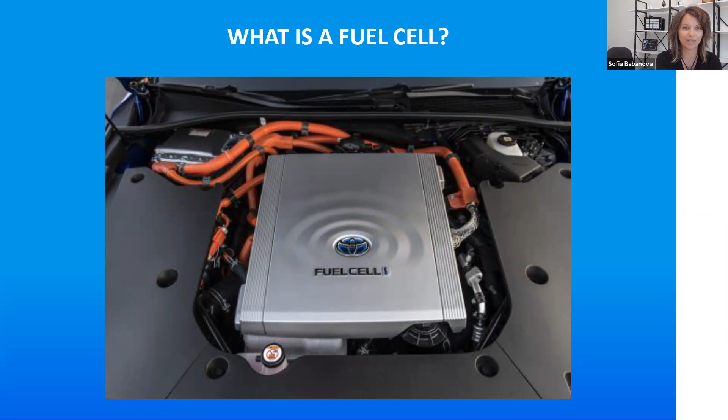So before we go into the topic of microbial fuel cells, I would like to explain what a fuel cell in general is, since microbial fuel cells are technically fuel cells. They're not that black magic as you think. So what is a fuel cell actually? A fuel cell is an electrochemical device that can transform chemical energy into electricity. So how is this done? There are a couple of components the fuel cell has. There is an anode, where an oxidation process occurs. There is a cathode, where there is a reduction process. And we often have a membrane to separate the anode and the cathode.

So a fuel, in this case hydrogen, comes into the fuel cell. It is oxidized at the anode by an inorganic catalyst, releasing electrons. These electrons travel through an external circuit to the cathode, where it's coupled with the oxygen reduction reaction in most cases. So then what is a microbial fuel cell? A microbial fuel cell is a fuel cell, as I mentioned before. It has exactly the same components. It has an anode, it has a cathode. Sometimes there is a membrane, sometimes there is no membrane.

But the main difference between these two technologies is that instead of inorganic catalysts, we have bacteria present either at the anode or the cathode that facilitate the oxidation and reduction processes, which makes microbial fuel cells bioelectrochemical devices. But they can still transform the chemical energy into electricity. In the case of microbial fuel cells, though, the fuel that comes into the cell is not hydrogen, it's some kind of organic. It can be a pure organic such as sugar, glucose, fructose, or acetate, or it can be something more complex such as wastewater. MFCs can generate electricity from any form of biodegradable organic matter.

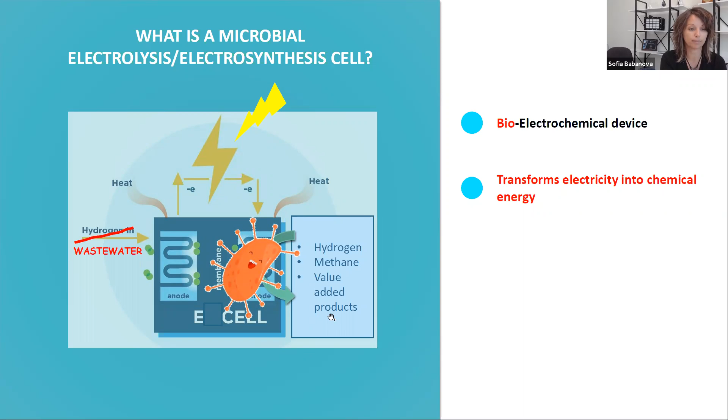And since we are oxidizing this organic matter at the anode, we are removing these organics from the wastewater. Oriana, can you please go to the next slide? Thank you. So this makes MFCs extremely suitable for wastewater treatment. There are other bioelectrochemical devices similar to MFCs, sharing a similar concept and similar design features, which are microbial electrolysis or microbial electrosynthesis cells. But unlike MFCs, they transform electricity into chemical energy. They also use bacteria either at the anode or the cathode, but the final goal of these devices is to produce value-added products, such as hydrogen or methane or something else. So what is the secret behind these bioelectrochemical devices?

Why can they do what we are saying that they can do? And the reality is that nature created these special bacteria, special microbes that are able to perform the so-called extracellular electron transfer. So they consume organics to gain energy. They oxidize these organics within the cell body. They release electrons, but these electrons do not stay inside. They actually travel through the cell membrane outside of the bacterial cell.

And they reach this solid electron acceptor, which in nature is some kind of mineral like iron oxide or manganese oxide and so on, and they respire. And that's how they gain energy in nature. We take advantage of nature and we replace this mineral with an anode surface. So bacteria do exactly the same thing. They consume the organics, they release electrons, perform this extracellular electron transfer. But this time, we capture these electrons at the anode, transfer them to the cathode to generate electricity.

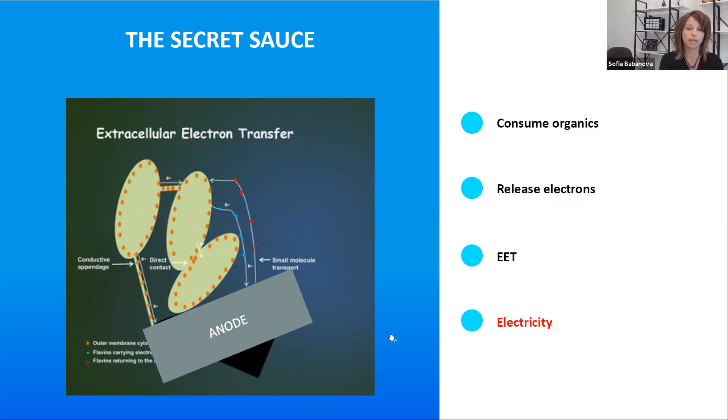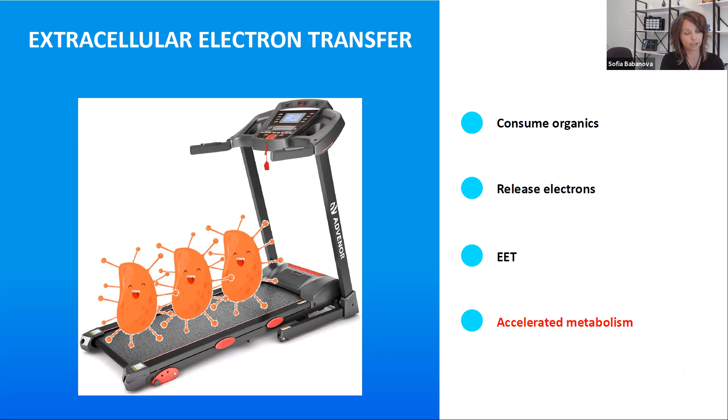So we are constantly pulling away energy from bacteria during the oxidation process. And by doing that, we are accelerating the bacterial metabolism. So these are microbes that are constantly on a run. They have to consume the organics faster. They have to consume more organics in order to gain some energy for themselves. That's why MFCs, when applied for wastewater treatment, can do it faster than traditional wastewater treatment technologies.

So there has been a global interest in MFCs throughout the whole world. On almost every continent, there are many research groups that have worked on microbial fuel cells for many years. And the concept of microbial fuel cells was discovered in 1911 by Professor Potter, who first came up with the idea of using microbes to produce electricity. But the research activity didn't pick up until the early 2000s, after which we can see an exponential growth in the interest and the number of publications within that field.

And the reason why this happened around the year 2000 is because MFCs were recognized as a renewable energy source. Since they can generate electricity from any form of organic matter, they are perfect as a renewable energy source. So many researchers started working in that area. That's how I was introduced to microbial fuel cells as well. But along the way, some hurdles and challenges have been faced. Some theoretical limitations have been recognized, and slowly the interest moved from renewable energy source into wastewater treatment solutions, since we are removing the organics from the solution. So around 2008, that was the main focus of MFC research.

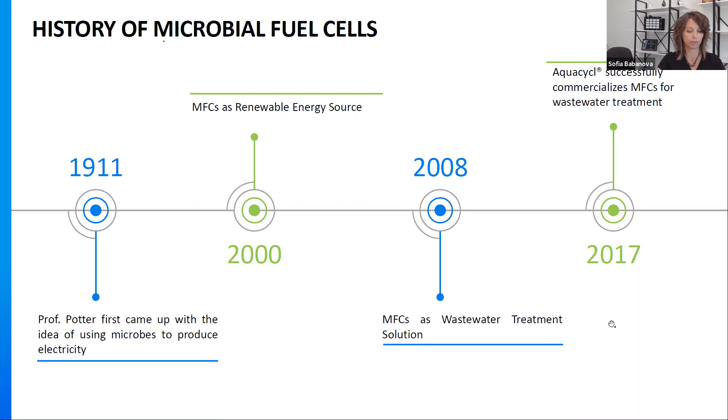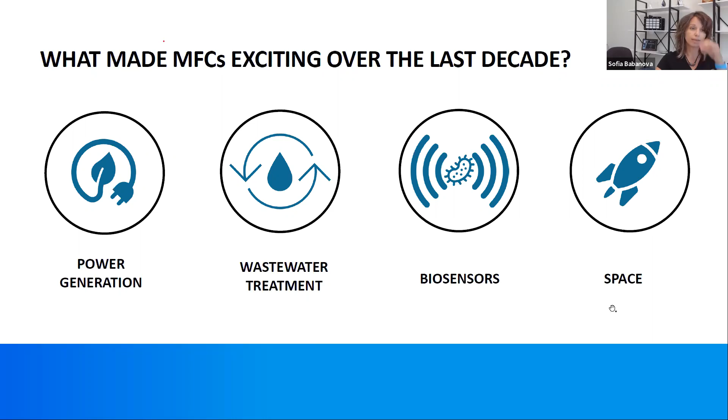So what made MFCs so exciting over the years? I mean, we can generate power, that's great, from any organic matter, which means we can treat wastewater, that's even better. They can be used as biosensors to study the health of the microbial community, be used in other wastewater treatment applications, and MFCs can be used in space to recycle the waste products, the wastewater, and generate power. But despite these exciting features, people shifted their interest from power generation into wastewater treatment. But what Aquacycl is actually trying to do is to take both these advantages and develop a self-sustainable wastewater treatment solution.

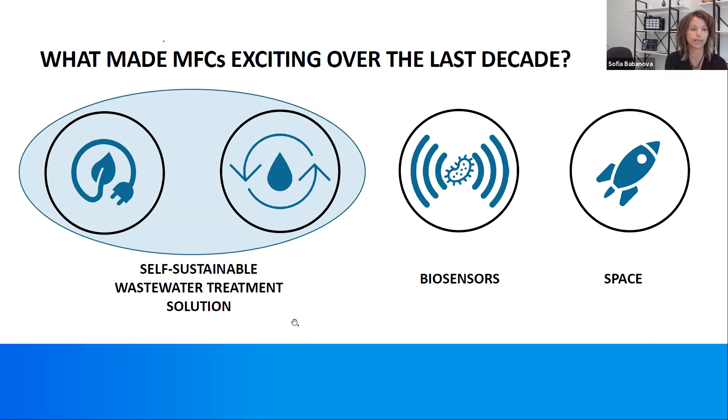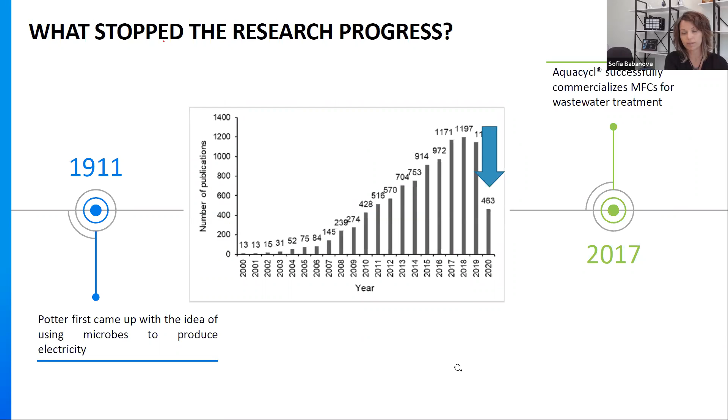So what happened? Why in the year 2020 was there a decline in the number of research publications? And there are a couple of answers. First of all, there was COVID. And second, many research groups tried to scale up these devices, and that proved to be very, very challenging. In addition to that, around 2018, the research interest shifted towards microbial electrosynthesis cells and using microbes to synthesize value-added products. But we are going to talk about scalability more in this webinar.

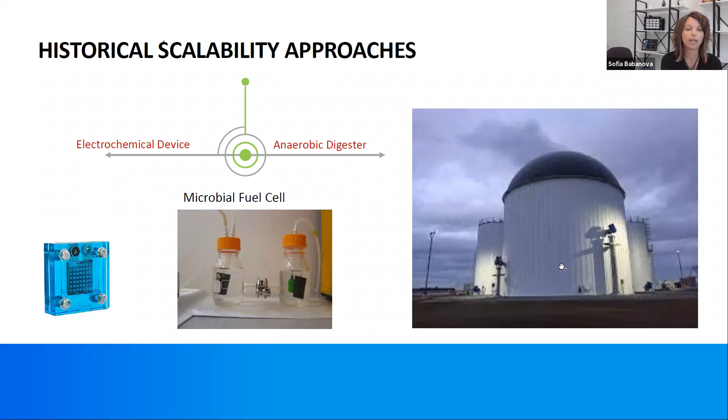Why was scalability such a big issue, and why was it so difficult to scale these devices into real technology and apply them in practice? The reason is the dual nature of microbial fuel cells. As we said, they are bioelectrochemical devices. So they have this electrochemical component. So do we scale them as electrochemical devices, or do we use the biological component for wastewater treatment and scale them up as anaerobic digesters, for example? So we'll go through the differences between these two approaches and the limitations that researchers faced there. So if we think about MFCs as electrochemical devices, as I mentioned, they are fuel cells.

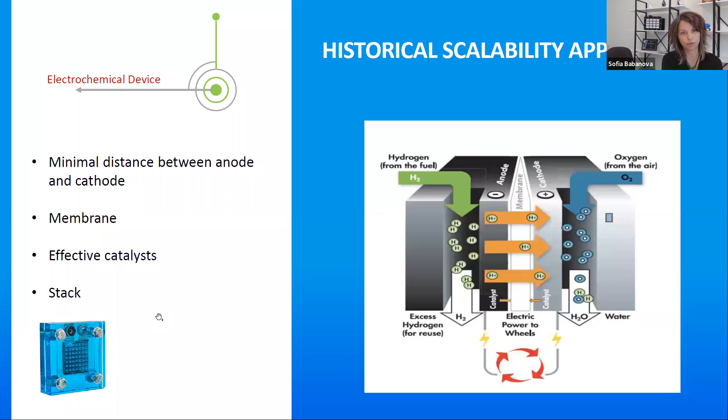As fuel cells, they require certain aspects to be met, like minimal distance between the anode and the cathode. There should be a membrane to separate these two electrodes since they're so close to each other. You have to have a very effective catalyst to produce enough power. And of course, one fuel cell cannot provide enough to power anything, so you have to have a stack of those. So we'll go through all these different aspects.

Let's talk about minimal distance between the anode and the cathode. In order to minimize the electrical losses, the anode and cathode need to be close to each other. But when you're talking about wastewater treatment, that makes this required sandwich structure not very applicable because wastewater has high solids content, and that will cause clogging issues. And having the anode close to the cathode, there is some crossover of oxygen from the cathode to the anode. So aerobic conditions appear at the anode surface, which are detrimental for MFC operation.

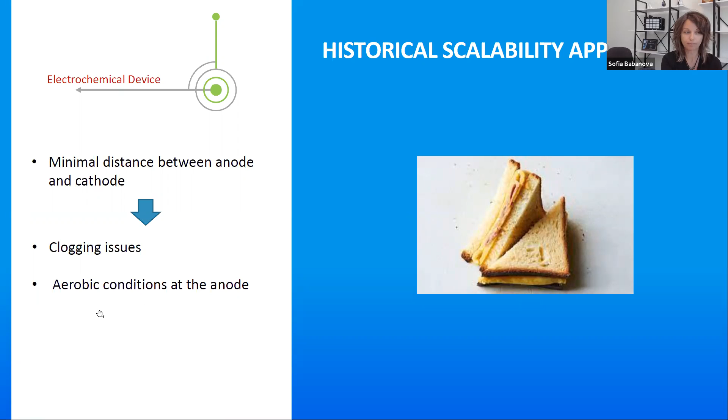Then we want to treat wastewater. Wastewater has big volumes. What do we do? Do we just make a bigger sandwich to accommodate more volume? Can we do that? How can we do that? Scaling up electrodes, making them bigger, introduces huge ohmic losses because electrons now have to travel a long distance in order to be utilized. In addition, the majority of electrodes in microbial fuel cell applications are based on carbon textile material, so keeping the mechanical strength when they're so big has also been a challenge for many research groups.

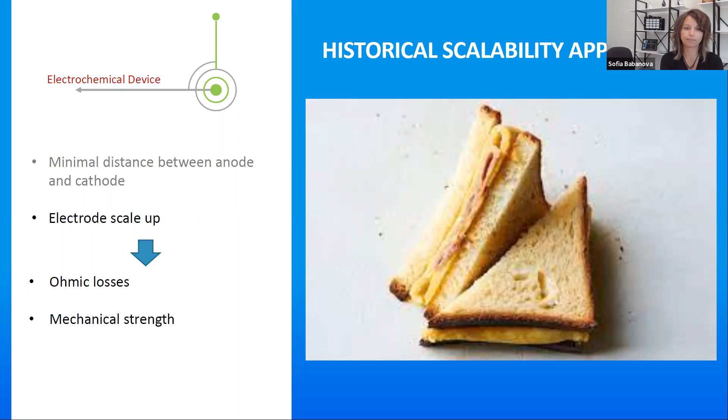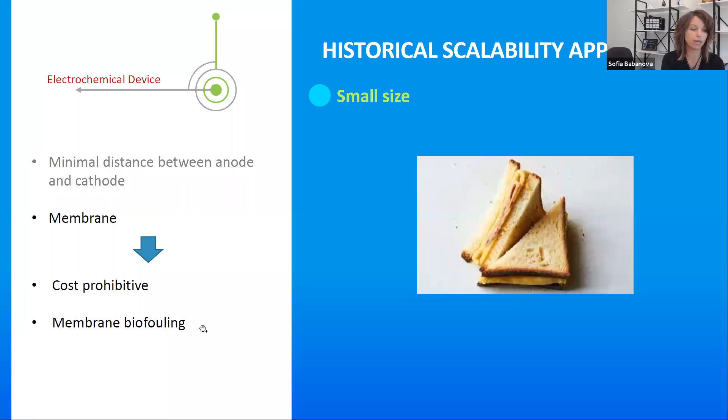So MFCs have to be small. If we want to optimize them as electrochemical devices, they have to be small. They cannot be big. I mentioned you have to have a membrane in that sandwich structure, between the anode and the cathode. Membranes are really expensive, which makes MFCs cost prohibitive and not competitive with other wastewater treatment technologies. And when these membranes are in contact with bacteria or wastewater, they're prone to very fast biofouling.

We have to have an effective catalyst if we want to get more power. Unfortunately, the best catalysts for oxidation or reduction processes are gold and platinum, which are very expensive. That also adds to the cost of MFCs, and they're not cost competitive.

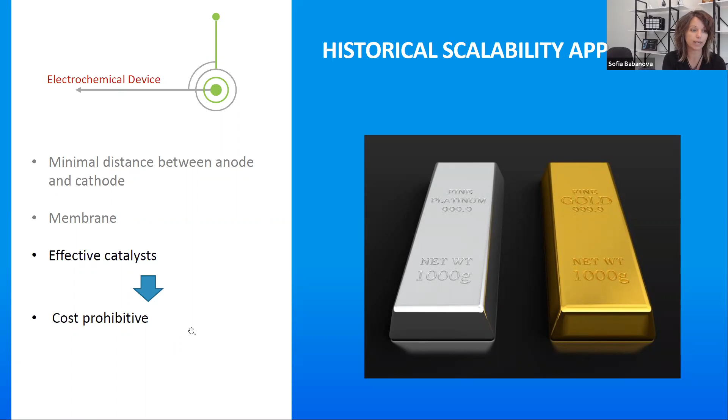And as I mentioned, there are theoretical limitations on how much power can be produced by one fuel cell, regardless of whether it's just a fuel cell or a microbial fuel cell, which is not enough to power a fridge, let's say. So you need a multiple stack of those. Technically, you have to have multiple sandwiches, or a big lunch.

Some research groups have managed to use that approach efficiently. Bristol Robotics Lab in the UK took that approach, having small microbial fuel cells, multiple in stacks, treating urine to generate power and power the light bulbs in the toilets. They were successful in that adventure. Unfortunately, because of the small size of the MFCs, they are applicable only for urine treatment. It cannot be applied to any other type of wastewater that has high TSS content because the small size will be prone to really fast clogging.

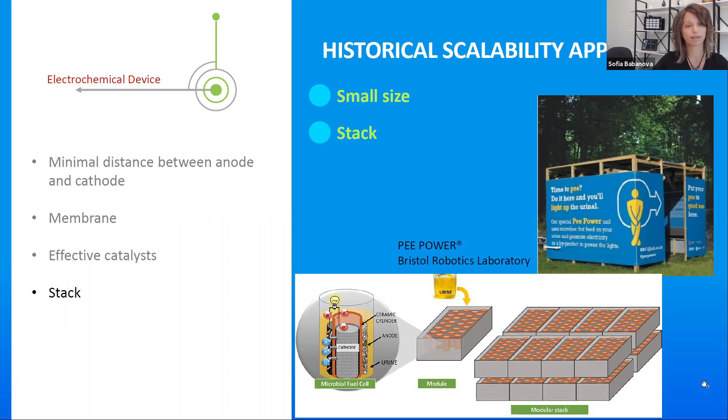So let's take a look at the other approach. What if we scale up microbial fuel cells as anaerobic digesters? Anaerobic digesters are big. They have to hold a lot of volume. Anaerobic treatment usually takes from a couple of days to a month, so all this volume needs to be kept in there. They operate in batch mode, which means the water sits there for the duration of the treatment, and then it's replenished. So if we try to scale up microbial fuel cells like that, we have to make them big.

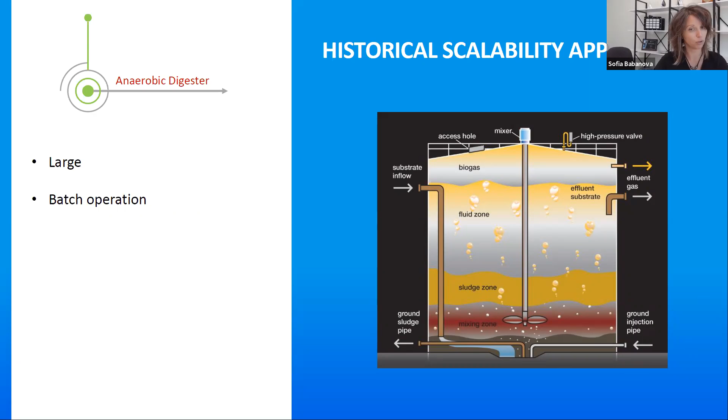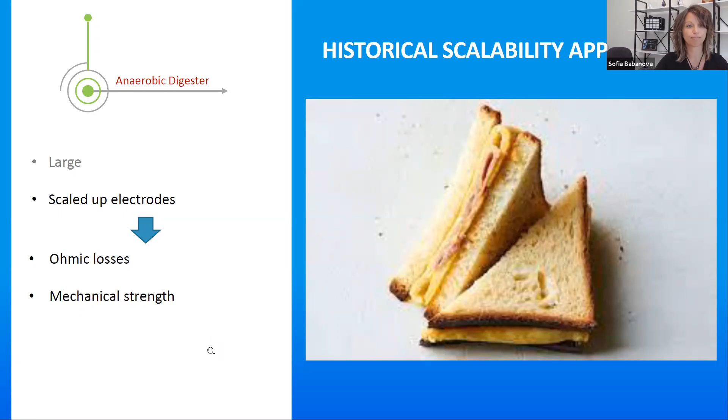And we are going back to the same challenges we discussed earlier. If you want to make microbial fuel cells big, we have to make a big sandwich, right? We have to scale up the electrodes, and we see the same ohmic losses and the same mechanical strength issues. But let's say we managed to overcome that and build enormous anodes and cathodes and place them in a gigantic microbial fuel cell. Then these electrodes are so far from each other that we face mass transfer limitations, which means the electricity generated will be so small that it cannot drive the wastewater treatment fast enough as in other MFC designs.

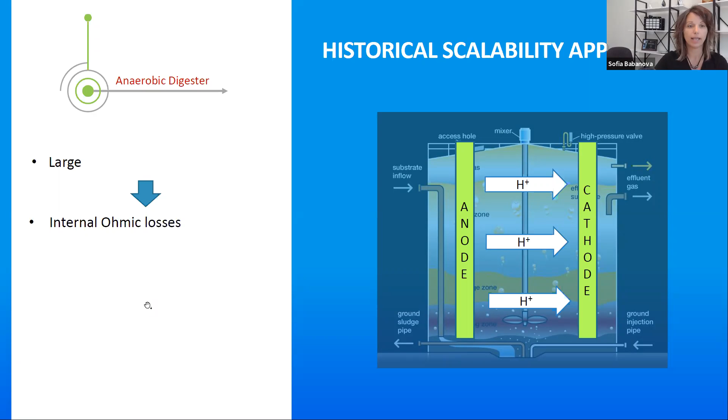And also, when we have one big microbial fuel cell, we can generate voltage theoretically up to 0.8 volts. We are not taking advantage of having a stack of fuel cells and increasing the power.

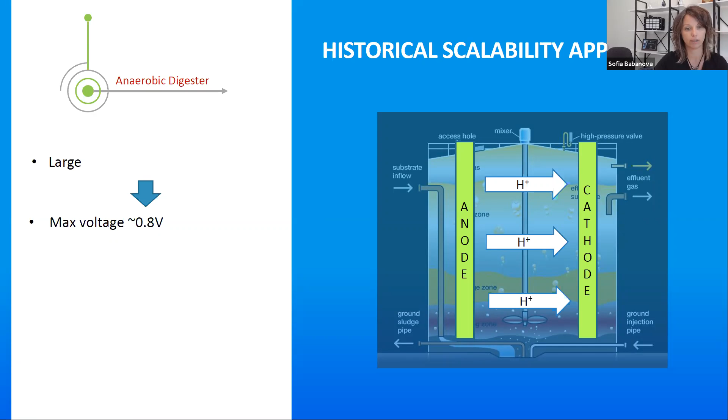Another aspect is that, as I mentioned, anaerobic digesters work in a batch mode. And that means that bacteria processing this wastewater release final products. And these final products actually cause inhibition effects. Bacteria sense them and they say, okay, stop, we work too much. Now we have to slow down. And that was the reason why for many years it was thought that MFCs cannot be used for high strength wastewater. They're applicable only for low strength wastewater because most lab studies have been done under batch operation.

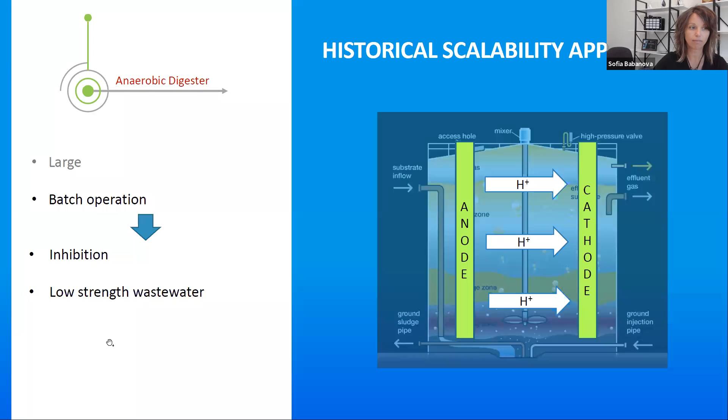So what has Aquacycl done differently than other research groups? Why did we manage to be successful in that scaling up process? And the reason is that we took that middle ground approach. We didn't scale up the technology only as an electrochemical device or only as a biotreatment process. We have a microbial fuel cell reactor that is the size of a standard car battery. So it's not small, but it's not big as well. That minimizes the clogging issues.

The anode and the cathode are far away from each other so that we can keep an anaerobic zone around the anode. Then because the fuel cell is not big, we reduce the ohmic losses. We don't have these mass transfer limitations. And we managed to scale up the electrodes to an extent where we can still maintain mechanical stability and performance efficiency.

We do not use a membrane, which eliminated the biofouling problem. It made the MFCs more cost-effective and reduced the ohmic losses that can be introduced by the presence of a membrane. We found a cost-effective catalyst to be applied that makes MFCs affordable and scalable.

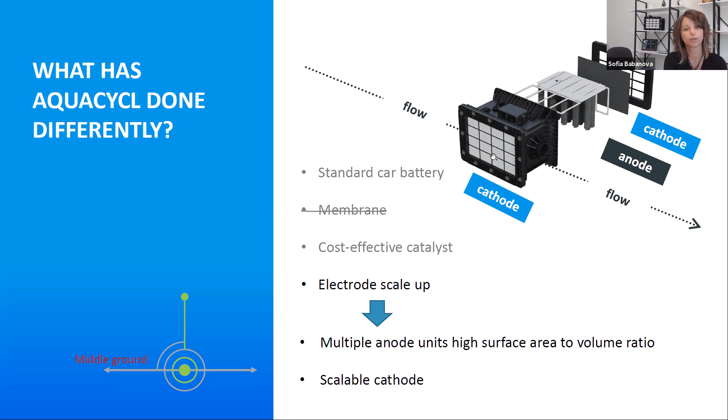And as I mentioned, we managed to scale up the electrodes. We took a dual approach. So we scaled them up slightly, made them a little bigger, but at the same time, we use multiple units, let's say multiple anode units, to provide high surface area to volume ratio. At the same time, they're spaced apart from each other to minimize clogging issues, but still have high efficiency. We took a similar approach for the cathodes. We have two cathodes on both sides of the microbial fuel cell to provide higher surface area.

So, but one MFC cannot do all the magic, right? It's impossible that one reactor can remove all the organics from the wastewater. We have to have multiple of those. But to avoid this batch operation, we actually run microbial fuel cells in hydraulic series. We call them treatment trains. So the wastewater goes into the first MFC. It has been treated a little bit. Then the effluent from that first MFC goes into the second, treated a little more, and so on until we reach the effluent quality that is desired.

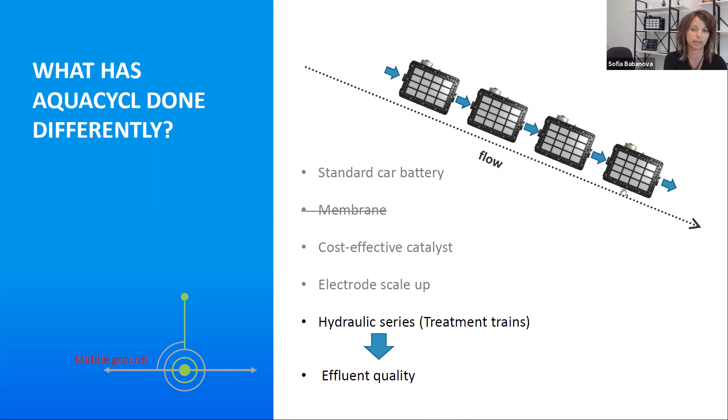So as I mentioned, this allows us to run the process under continuous mode, which means no inhibition. We are not accumulating these final products of the metabolic processes. And at the same time, we allow microbial communities to self-select in the different microbial fuel cells according to the wastewater composition at that point.

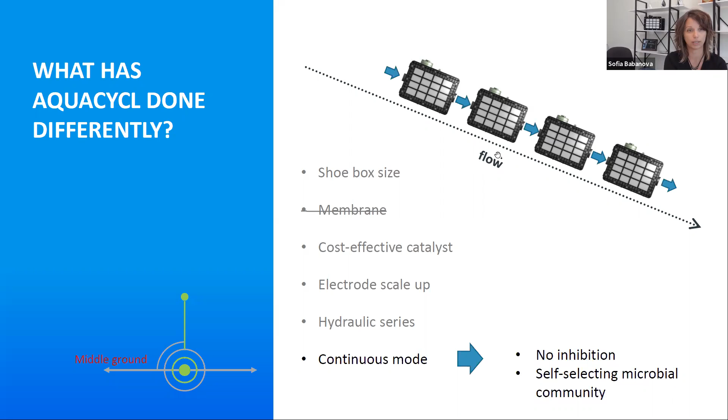And at the end, we take advantage of the modularity. We have multiple treatment trains that operate in parallel to increase the volume of the wastewater we can treat. And at the same time, that allows us to maintain the system easily. So we can maintain one treatment train while the rest of the system is still operational.

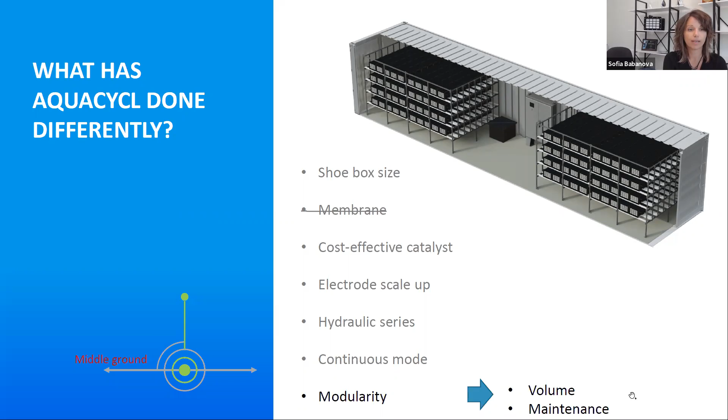And in summary, what has Aquacycl done differently? We optimize microbial fuel cells for wastewater treatment efficiency instead of energy recovery. We took advantage of the hydraulic series and treatment train design, operating the system under continuous mode. And we have these parallel treatment trains to increase volume instead of having one big reactor. In addition to that, we provide real-time remote monitoring of the system performance and control.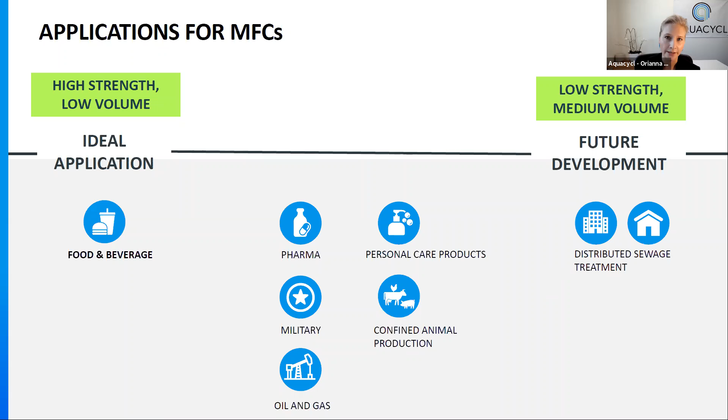We think the best case application in that industry is really going to be on the distributed side. So looking at replacements for septic and or small communities in terms of decentralized wastewater treatment and sanitation. But that's low strength, right? And still addressing a smaller volume than the larger centralized systems. And so, where the technology has been a good fit so far, has been focused in these areas where you've got really high soluble and insoluble biological oxygen demand, or BOD. So the insoluble, right, represents itself as total suspended solid, or TSS.

But some of the challenges that conventional treatment technologies face are the same that microbial fuel cells face, right? Fats, oil, and grease. That becomes an issue when you've got anaerobic digestion or activated sludge or any membrane technology. And so fats, oil, and grease, or FOG, also is a challenge for microbial fuel cells, but we can tolerate up to around 300 milligrams per liter of FOG. That's higher than most conventional.

You're still going to have challenges with MFCs across extreme temperature ranges. There is more flexibility with MFC technology in that they can operate within a range of 10 degrees C up to 55 degrees C. So just above freezing and up to some of the hotter temperatures, but you still need to bracket that temperature control. pH range: it's a biological system, right? So you must stay within a pH range of between 5 and 9 for microbial fuel cells.

It's a little bit wider than some of your other technologies, which will be very sensitive to a more neutral pH. But overall, right, these are some of the advantages that microbial fuel cells can bring in terms of a wider operational range on some of these areas. And at least with our systems, we can tolerate a much higher total suspended solid concentration, or TSS, than many other conventional technologies. So we've demonstrated successful degradation and treatment of wastewaters with TSS up to 35,000 milligrams per liter, and that's a direct feed.

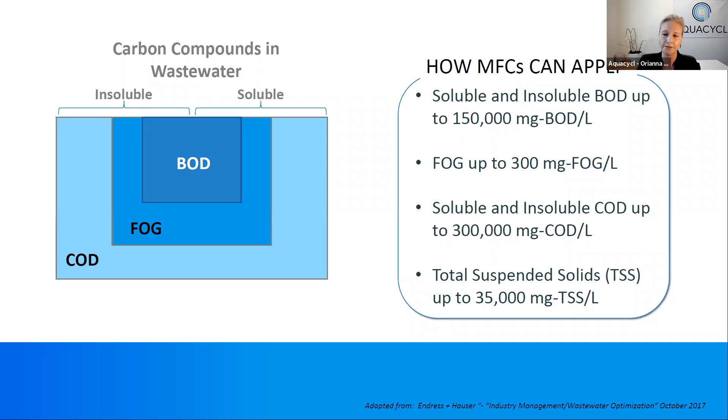But as Sophia had mentioned, the treatment efficiency is really going to be dependent on what it is that you're treating. So not only the concentration of your organic compound coming in, but also the composition. And so when you're looking at biological oxygen demand, especially in the food and beverage industry, depending on what you're making, your composition of wastewater is going to be different.

If you're confection, depending on where you are in confection, largely that's going to be simple sugar, right? Sucrose and glucose. If you're in soft drinks, you're going to have sucrose, glucose, but you're also going to have artificial sweeteners. You're going to have some caffeine. You're going to have some other additives in there, which will increase the complexity. In snack food, you've got starches, you've got more compounds that require hydrolysis and fermentation. Sugar refineries, just straight up sugar.

But in breweries, which has been one of the first applications of microbial fuel cells, you actually see some of the most complex wastewater because of what comes out. You've got some trace yeast, you've got some unfermented sugars, you've got hops, you've got potential residuals from grains, etc. And even though there's typically a solid separation step, you still have these trace elements. And during a fermentation with yeast, there's a lot of secondary metabolites that are involved, and that can occasionally be confounding to microbial fuel cells. And so the complexity of brewery wastewater is something that has challenged microbial fuel cells in the past.

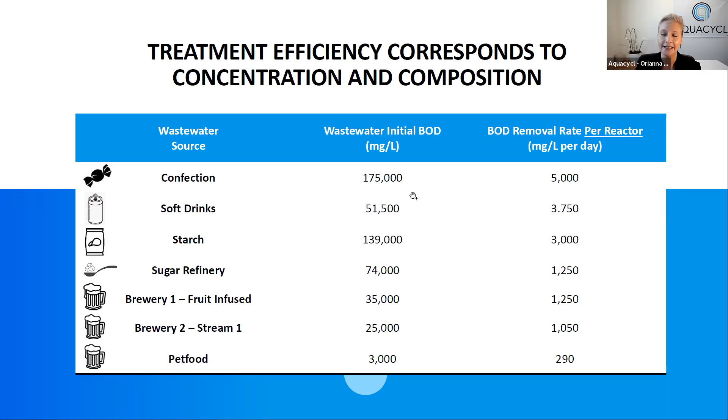But we see some of the best efficiencies and the highest treatment rates when we're dealing with the highest concentrations of BOD and the lowest complexity. So that's an easy target. That's a value add where the technology can be a good fit. Where some other technologies, like even high rate anaerobic digesters, are typically limited on feeds around 15,000 milligrams per liter. And so we're well above that in terms of what we can take in an undiluted fashion and treat in a range of hours instead of days.

And so how the technology really stacks up relative to others that are out there. We borrowed this and did a modification from one of our colleagues. When you're looking at biological oxygen demand in a range, you have the lower range of BOD, and this is generated from sewerage. So you've got municipal wastewater, which can come out in the higher range over here. And then you've got just some trace organics that you might want to remove for a reuse application. And your best bet for reuse applications at the tail end is always going to be a membrane-based technology right now.

But as you start to increase in organic concentration, going up the scale, you're now more limited in the types of technologies that can address these wastewaters directly. There's high rate anaerobic digesters, there's the conventional anaerobic process, and then there's anaerobic membrane bioreactors, which are also a solution to address these higher ranges. But none of them, to our knowledge yet, can address anything above 50 to 100,000 directly without some dilution or having to recycle multiple times through the reactor. So that extends your hydraulic residence time in total, which means your footprint is going to be a lot bigger, your residence time will be bigger depending on the flows that you have to manage.

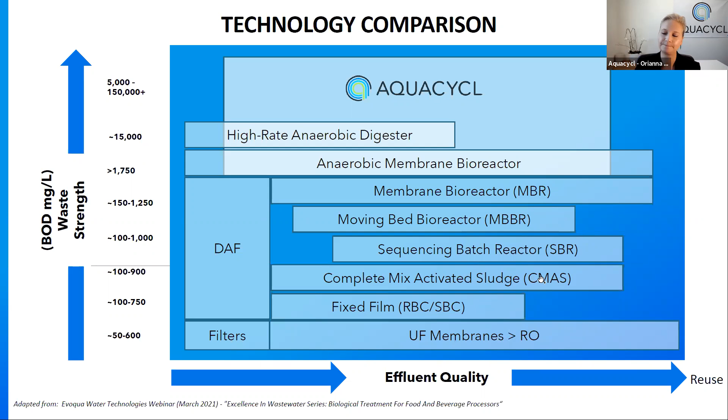So where we really see the best fit for microbial fuel cells is as industrial pretreatment, right? Because we can take in these high concentrations and take the tough stuff first. We apply to situations where a producer may be hauling wastewater offsite because they either are not permitted to discharge to their sewer, or the sewer surcharges are so high when they do discharge that it is cost prohibitive. So the alternative right now is just to truck it somewhere else. And so we can eliminate that, sit on site and treat that wastewater directly.

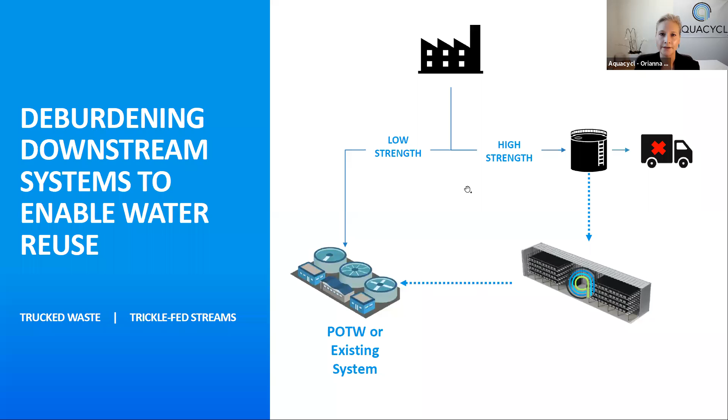And so either you're discharging to a POTW, to a sewer, or you're installing other technologies at the back end for a reuse application. But that is one of the first areas where MFCs can be a good application. The second, but less explored opportunity is really again, industrial pretreatment, but ahead of an anaerobic digester. So you have two anaerobic technologies complementing each other.

And anaerobic digesters have been the workhorse in industrial wastewater treatment for decades, and really the only solution that's been available and widely accepted for energy recovery as methane. But if you have an anaerobic digester at a production facility that's been there for a few decades, it may be aging. Perhaps the production environment has changed and you're sending more concentration to it than when it was initially designed for.

And so instead of having to rip that out and replace it, or adding new digesters or reaction tanks to that system, you can deploy a microbial fuel cell ahead of it to help decrease some of the loading going in, but also actually change the composition of that carbon that moves into the digester. So not only does some of that carbon just get fully degraded into electricity,

but that carbon composition becomes volatile fatty acid. And that volatile fatty acid, while kept within the right confines, can be a great feedstock for anaerobic digestion and actually increase the biogas production out of an existing bioreactor between 25 and 50%, depending on what it is you're starting with. So this is industrial pretreatment, but complementary to what is already out there to enhance energy recovery and health of an existing system.

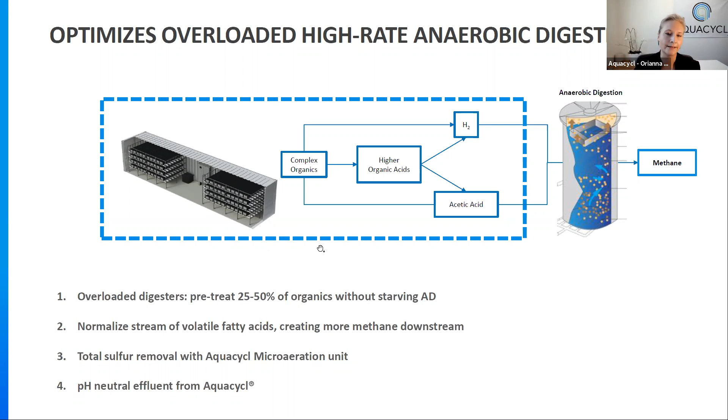And so we talked a little bit about the future, and really there's still work to do. Microbial fuel cells are still just getting into the early stages of successful commercial deployments. And so the next step on the research side really is looking at how microbial fuel cells can now be applied cost effectively and commercially into synthesis and electrolysis, as Sophia discussed earlier. That's still very nascent. On the commercial deployment of microbial fuel cells that are out there now, the next stage is how can we really take advantage of the energy recovery capacity of these systems?

We're not making methane, so there's no cogeneration capacity that comes with these systems, but we are making direct DC power. Now, in order to harness that, you have to have a battery pack installed. You have to capture that energy which is being recovered. You want to store it and then use it somewhere. But you're always going to have a loss if you're trying to convert from DC to AC usage.

So best case scenario is that you're storing your DC power and using your DC power in charging stations, where that's charging a forklift, or EV charging stations, or LED lighting, for example, in the warehouse facilities. And so we see those as the best first use cases for energy recovery from microbial fuel cells. And as capacities improve and as MFCs are further optimized for this process, you maybe can branch out into more power and more useful energy recovery from MFCs.

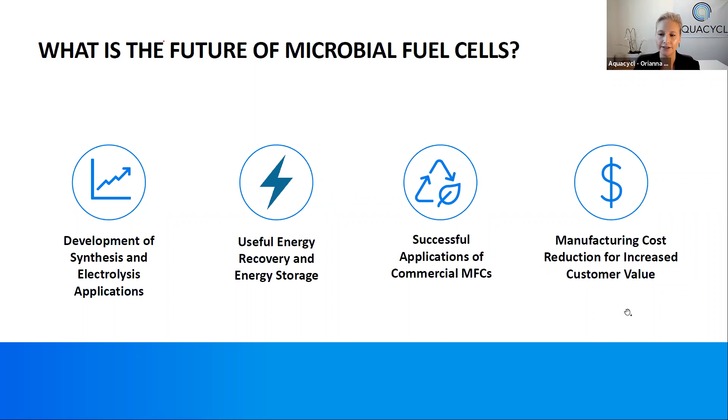And one of the big focus points that we have is really in energy recovery, and the promise is real, right? When you're talking about the different workhorse treatment technologies that are out there, so aerobic activated sludge, we all know that's very energy intensive, right? You're not making any power with that. You're consuming a lot of it though.

With anaerobic digestion, now this is conventional AD, you're talking about a longer hydraulic residence time, and you're making methane, and say you could either inject that for natural gas, or you're using it for cogeneration on site for electricity and heat. Well, per unit of organic that you remove, right? So say kilograms a day.

If you compare these three technologies to a microbial fuel cell, or specifically Aquacycl's microbial fuel cell, you look at energy consumption. So you've got a kilowatt hour per every kilogram of BOD that you treat, right? Of course, aerobic is really high. Anaerobic is pretty low, and microbial fuel cells through Aquacycl are even lower. We take advantage of gravity feed. We're a low pressure, low flow type of system. So we're not consuming much energy through the process, regardless of any energy that we might recover.

And so, how that plays out in kilowatt hours per day, right? You've got a range of costs, and that's always based on a range of efficiency of your treatment technology. Now, in terms of how many kilowatt hours can we reasonably recover per kilogram of organic that we digest, right? Anaerobic digesters are usually in a range between 1 and 1.2. We've seen higher, we've seen lower. Aquacycl is right in that same range, right? And that's as DC power.

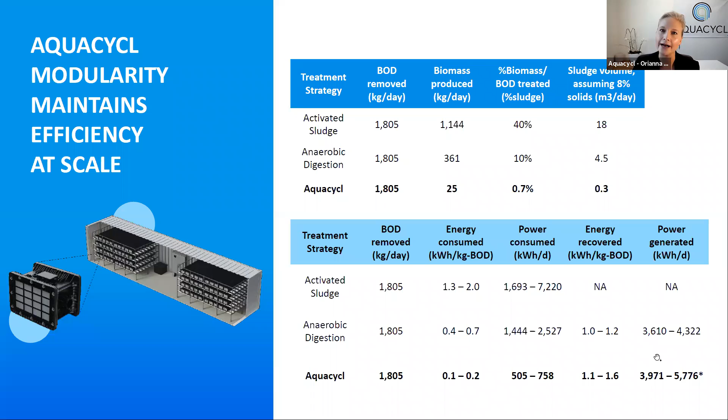And so, all in all, the power generated from these systems can be equivalent to what you see out of AD, but we're just not there yet, right? There's some infrastructure work that still needs to be done to make this a true value add to food and beverage or other applications. So let's talk a little bit about the myth versus the reality.

Okay, so we talked a lot about scalability today, and the myth is microbial fuel cells are not scalable. Well, that's not true. I hope that you agree with us that that myth is busted. Microbial fuel cells can be scaled for commercial applications. However, the first applications are still going to be lower volume. We're talking 10,000, 20,000, 50,000 gallons a day, right?

Lower volume, and a high concentration, right? Those concentrates that can be really problematic in food and beverage production or other production arenas. Those trucked off waste streams, right? Those really high surcharge waste streams. That's a great best fit for today. Tomorrow, right? Next year, there's going to be more opportunity, but for right now, that's the best case.

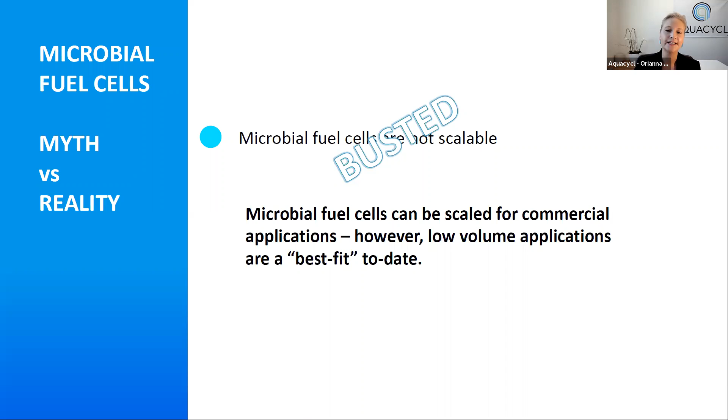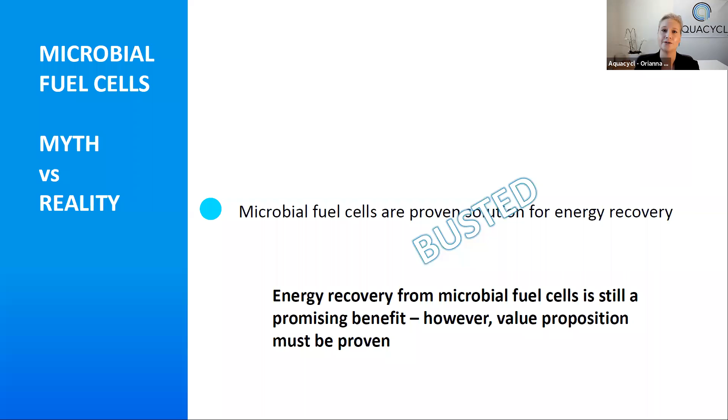Another myth: microbial fuel cells are a proven solution for energy recovery. No, that is not true. And hopefully we learned more about that today. Energy recovery from fuel cells is still a very promising benefit, and it's measured. We know the power is out there, but it's discharged to ground right now. And so the next stage is, how do you harness that? How do you harness it cost effectively in your specific project?

All right. The next myth is that microbial fuel cells can work for all wastewater applications. Well, in the research field, I would probably say that most wastewater that's generated globally has been tested by somebody in a microbial fuel cell lab. There has been a ton of research out there about different applications and specifically wastewater applications for microbial fuel cells. And there's some great results, but they're still all at the laboratory stage. And we have only a few commercial installations to point to.

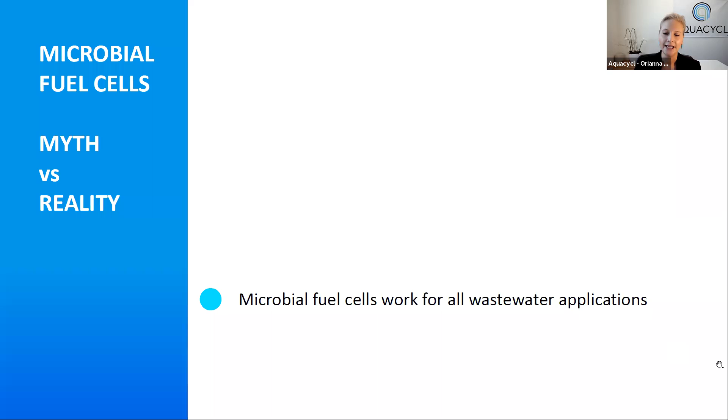And so, no, it won't work for everything, right? Microbial fuel cells are not a silver bullet, and there's optimization that has to be done for every single unique application that's out there in wastewater. Not to say it can't happen, but as of today, there are specific niches where microbial fuel cells make sense and other areas where they just don't. And that's more a value-driven decision.

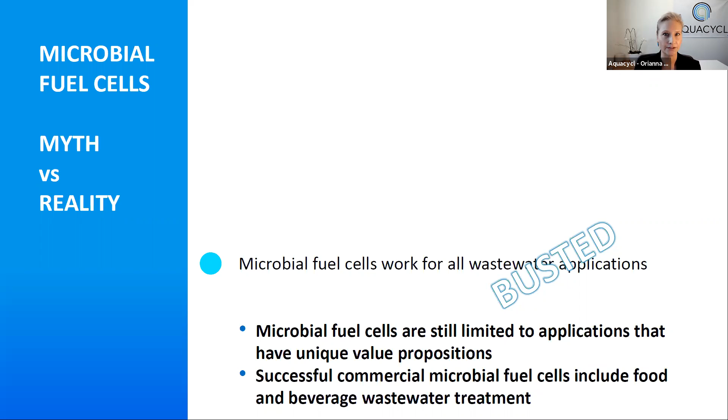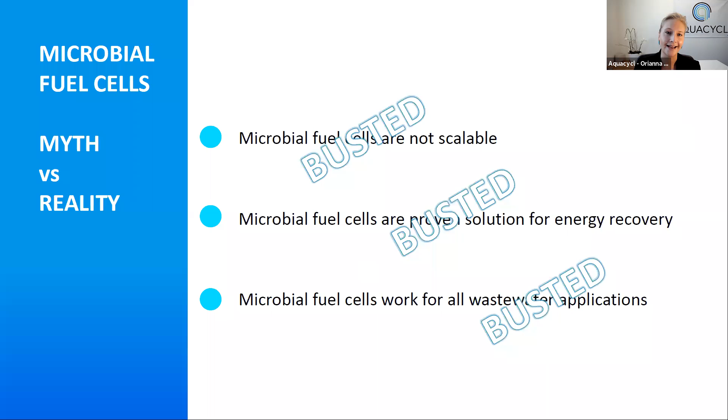All right, so we've busted a few myths and hopefully we've shared a bit of reality about microbial fuel cell technology and where it's at to date in its development stage, its commercial applications, and some of the best case usage areas for microbial fuel cell technology today. And so with that, I will still say that the future is bright for the technology. There's still work to do. But in terms of commercial deployments and the value that this technology can bring into wastewater treatment solutions providers, it's there, it's clear. It's not the silver bullet. But what's exciting is that the promise is still alive and there's still more to do.